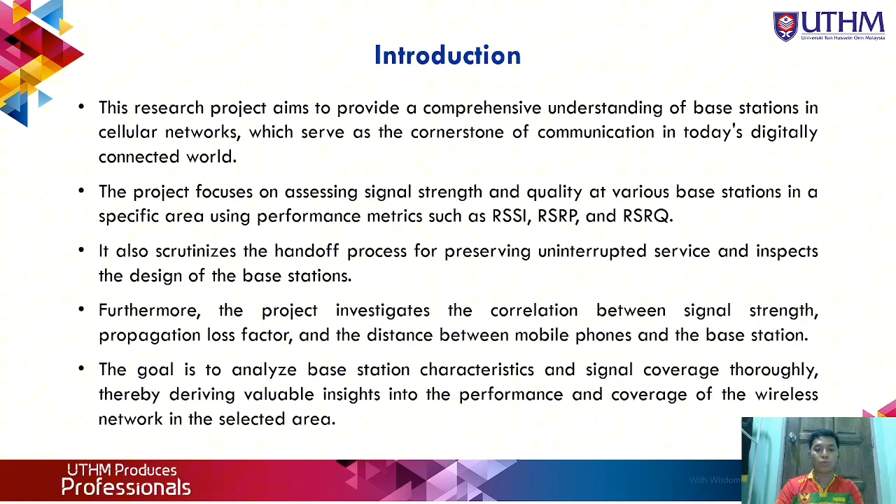And lastly, the goal is to analyze the base station characteristics and signal coverage, thereby deriving valuable insight into the performance and coverage of the wireless network in the selected area.

So moving on to the next part, which is methodology. The project was conducted in Parit Raja, Johor, and 3 mobile base stations were selected at 3 different locations. The first location is Kampung Parit Bengkok, then Jalan Parit Karjo, and lastly Kampung Teriman. The site location is an important factor in studying the handoff process of a mobile phone between two towers from point A to point B within a telecommunication network.

So this is base station 1, 2, and 3, and the measured locations to measure the power received from the mobile station and the distance between the mobile base station and the measured location. In this project, we are going to use CellMapper to measure the power received on the mobile application. CellMapper provides the power received and the GPS location, so we can get the precise location for our measured location.

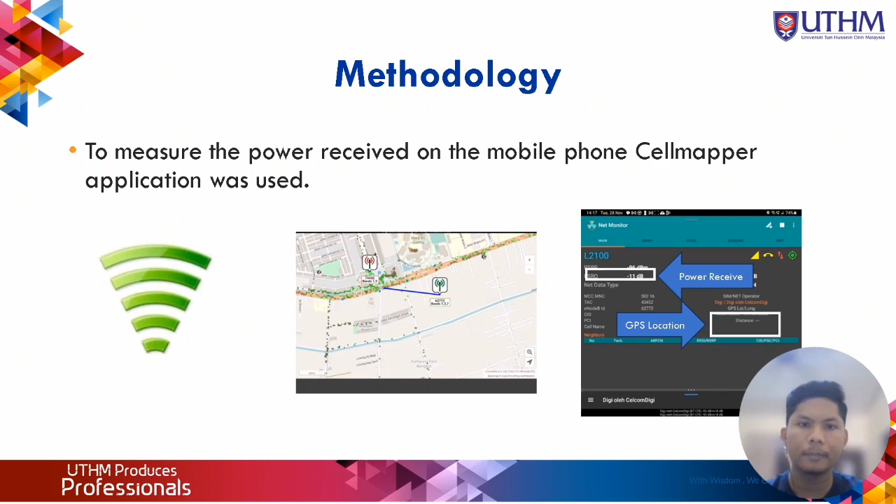The formulas that we use. The first formula is free space path loss, which is FSPL equal to 32.45 plus 20 log F plus 20 log d. The 32.45 is the constant. It is derived from the speed of light and the conversion between dB and natural units. The 20 log F term represents the frequency-dependent loss.

And the 20 log d term represents the distance-dependent loss. For the second formula, we use Okumura, which is L50 equal to FSPL plus Amu(f, d) minus G(hte) minus G area. The FSPL is the free space path loss from the first formula, Amu is the median attenuation relative to free space, G(hte) is the base station antenna height gain, and G area is the gain due to the type of environment.

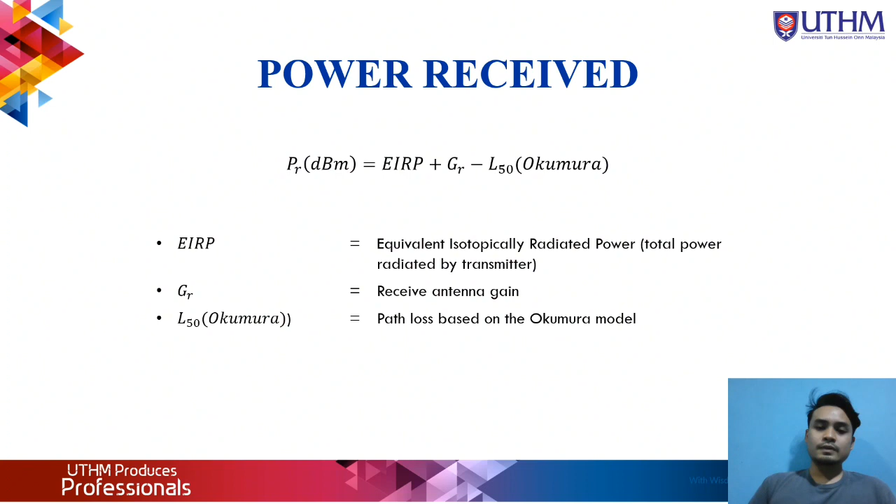For the analysis, data, and discussion, there are 3 base station areas that contain the chosen locations. Altogether, the data will be used to determine the level of the power received and the potential contribution to propagation loss. We will use the 3 formulas that I have mentioned earlier.

By using the following approximation, the plot points of Amu and G area are used for a number of frequencies in the Okumura model. For our base station, the frequency is 2162, and the area of our location is suburban, so the G area is 12. For the other base station, the frequency is 1870, so the G area for that frequency is 11.

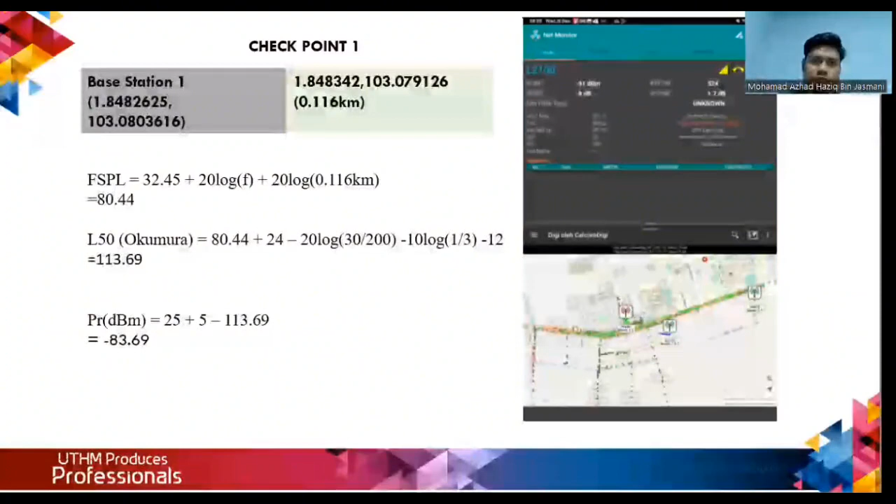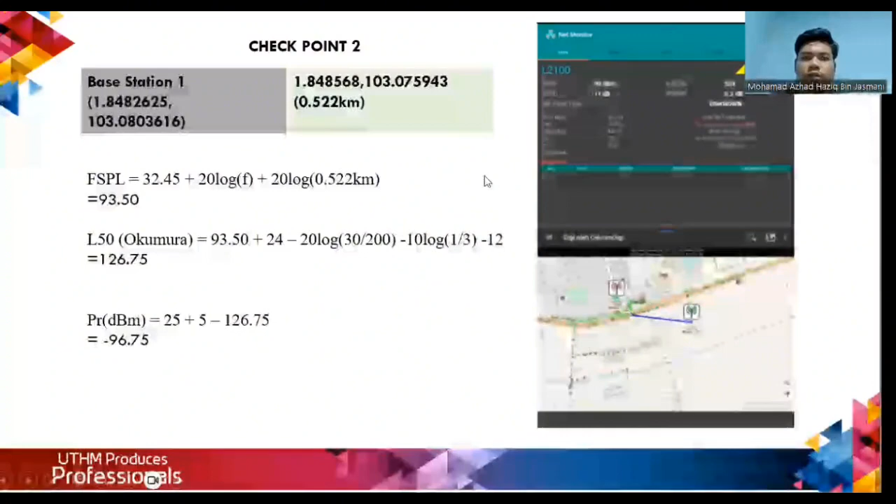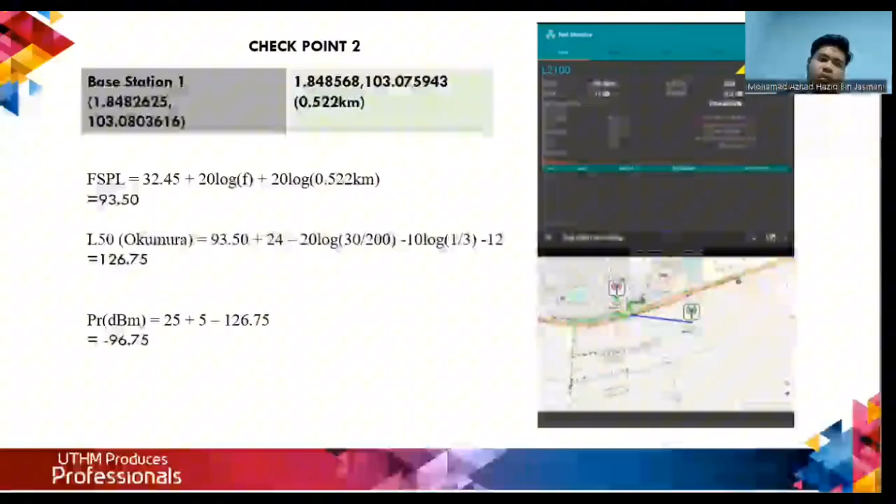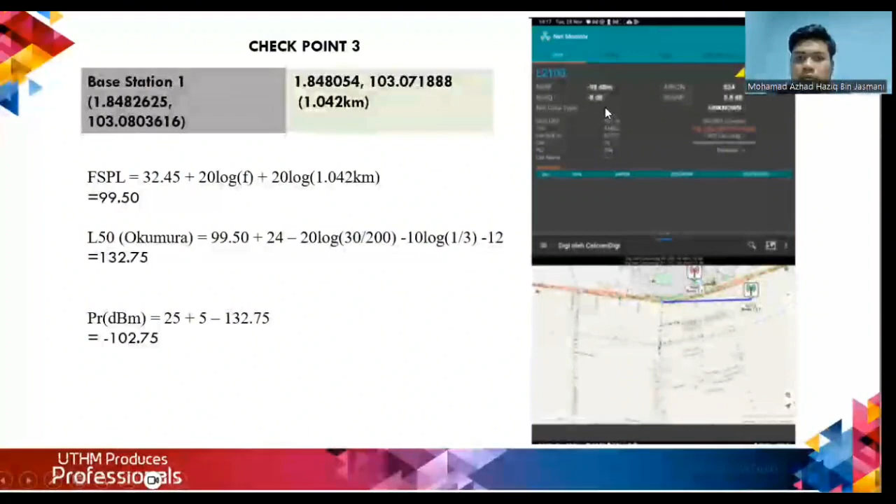Okay, for checkpoint 2, base station 1, the distance between base station 1 and the mobile station is 0.522 km, and we get the power received of negative 96.75, and for the RSRP we get the same, 96 dBm. Okay, for the third checkpoint, you can see we get negative 102.75, and for the RSRP at the cell mapper we get negative 98 dBm.

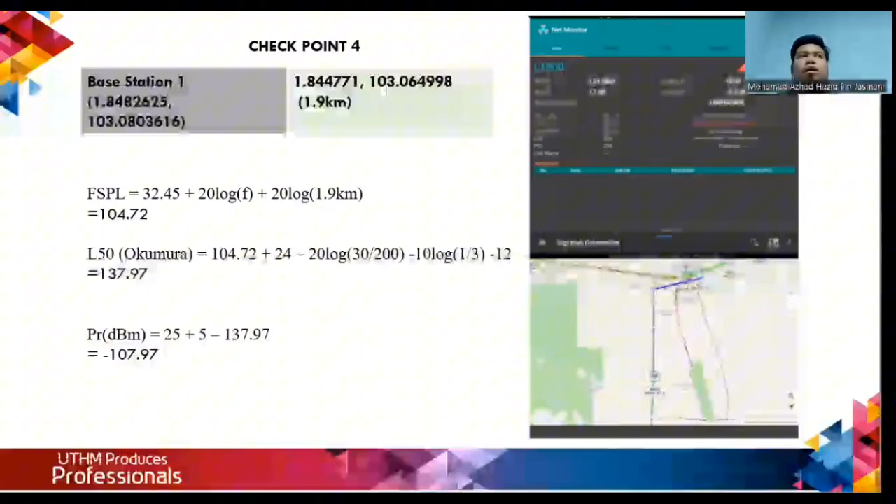That's checkpoint 4. We get the power received of negative 107.97, and the RSRP at the cell mapper we get negative 124 dBm. Okay, as you can see, at different locations the dBm changes. So the farther from the base station, the higher the negative dBm we get.

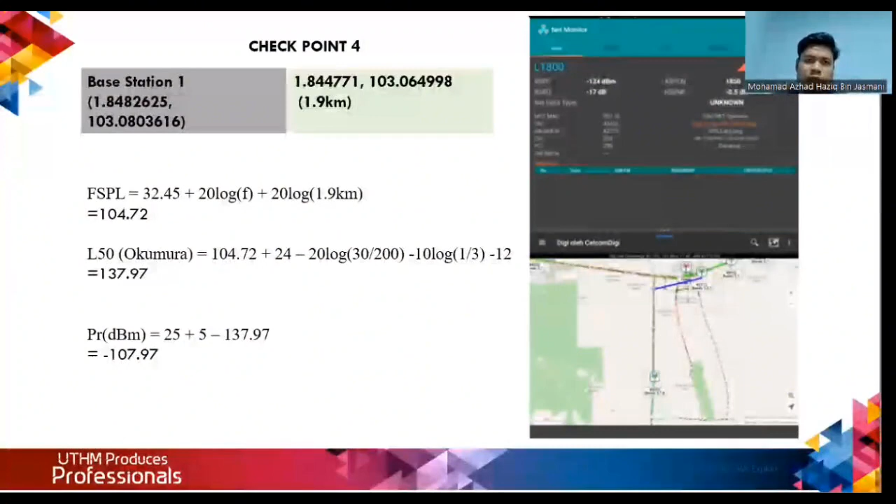Okay, for base station 2, for checkpoint 1, as you can see, the handoff is at checkpoint 4 and checkpoint 1. For checkpoint 1 for base station 2, the distance between the mobile station and base station 2 is 3.89 km, and the power received is negative 116.94. At the cell mapper we get negative 114 dBm.

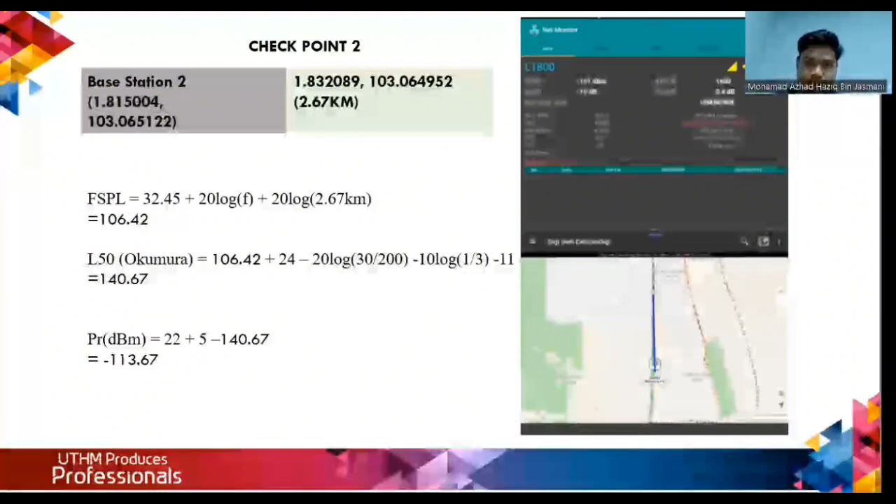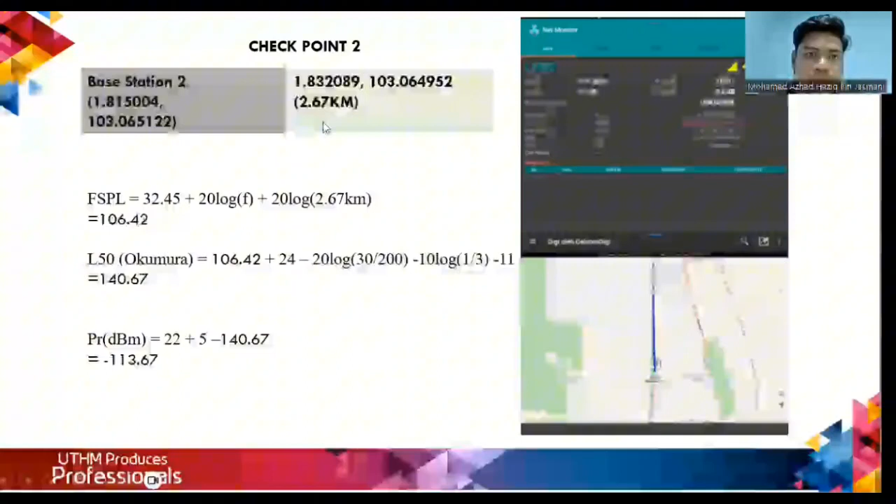Next is checkpoint 2. The power received is negative 113.67, and the RSRP at the cell mapper is negative 101 dBm. The distance between the mobile station and the base station is 2.67 km.

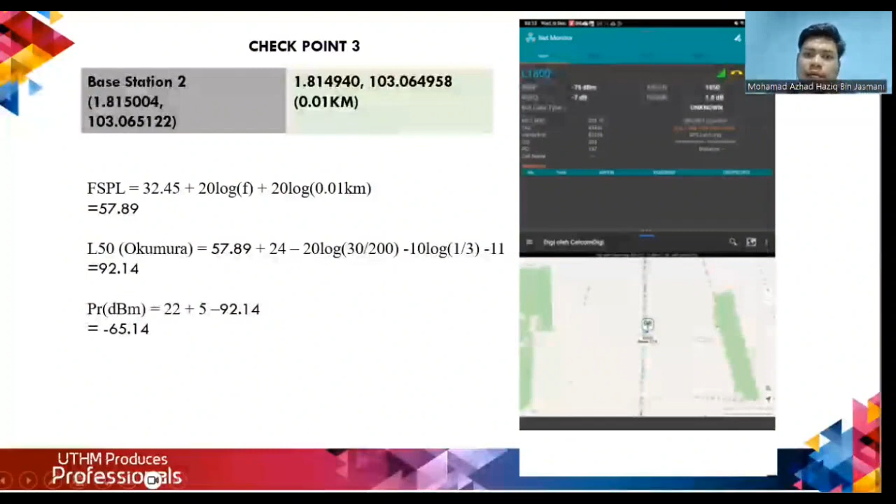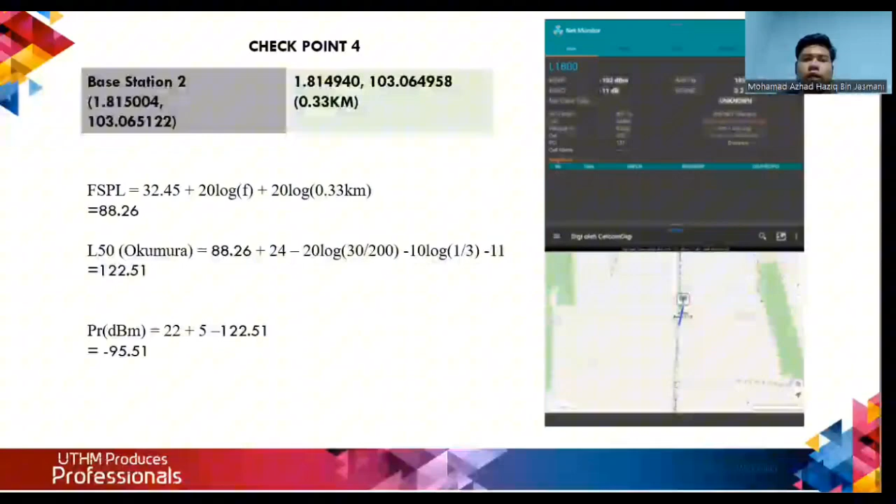Okay, for checkpoint 3 for this base station, as you can see, the distance is 0.01 km. The mobile station is behind the base station, and we get negative 65.14 power received, and the RSRP is negative 75 dBm. And lastly, for checkpoint 4, we get the PR of negative 95.5, and the RSRP is negative 102 dBm.

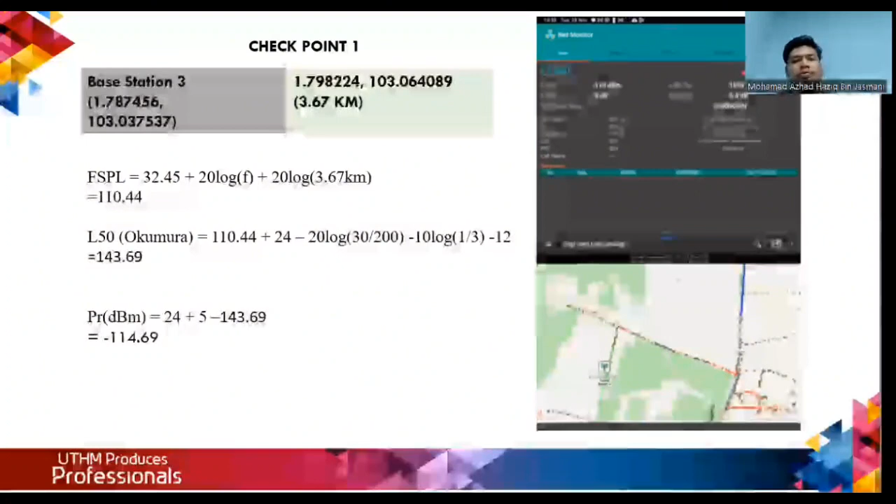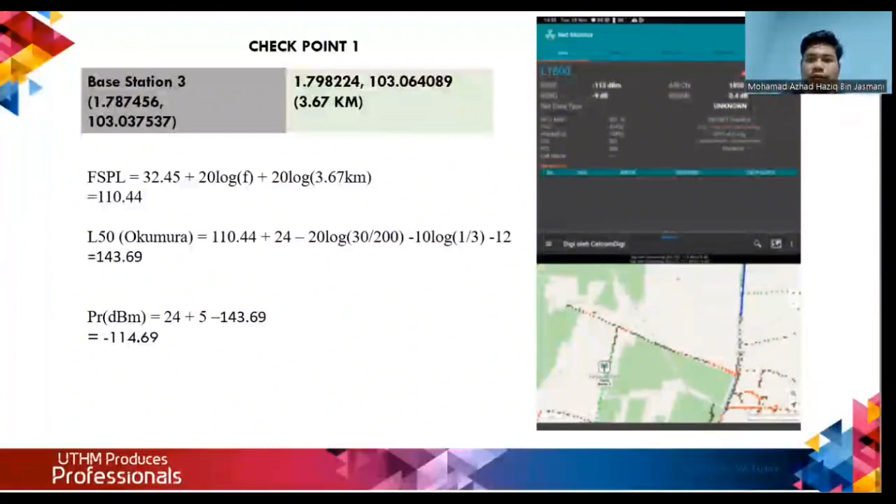Okay, for base station 3, for checkpoint 1, the distance between base station 3 and the mobile station is 3.67 km, and the power received we get is negative 114.69. The RSRP at the cell mapper we get is negative 113 dBm.

Okay, for checkpoint 2, you can see the handoff for checkpoint 4 and checkpoint 1, for stations 1 and 2. Checkpoint 2, the distance between the mobile station and the base station is 2.89 km, and the power received we get is negative 112.61. The RSRP we get is negative 114 dBm.

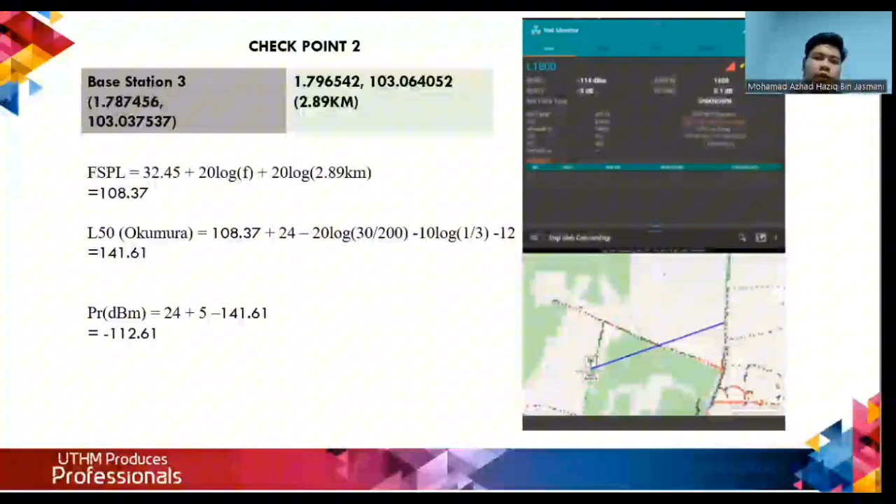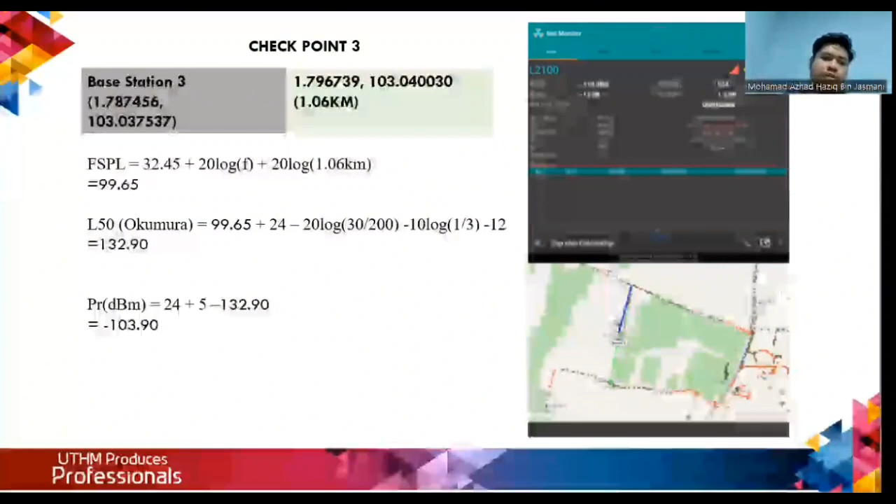Okay, for checkpoint 3, the distance is 1.06 km, and the power received we get is negative 103.90. The RSRP is negative 110 dBm. Okay, for the last checkpoint for base station 3, the distance is 0.04 km, and the power received we get is negative 75.44, and the RSRP at the cell mapper we get is negative 84 dBm.

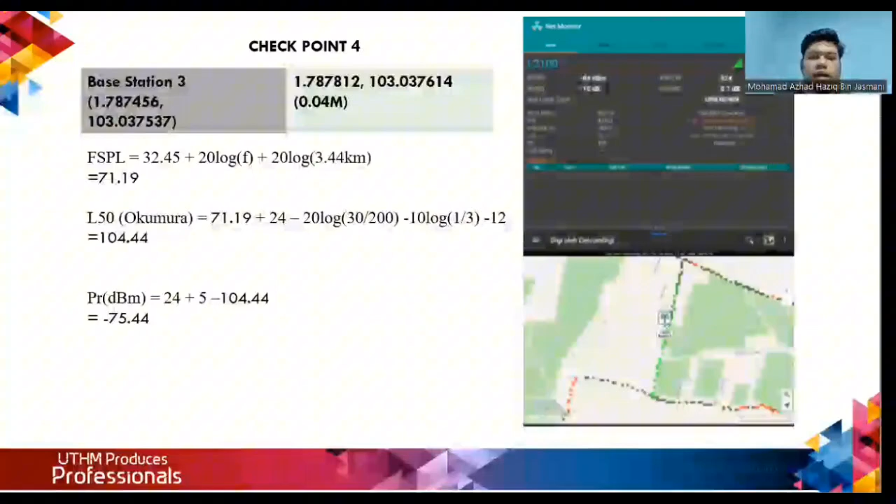As you can see, the simple conclusion: when we are close to the base station, the RSRP or dBm will be increased.

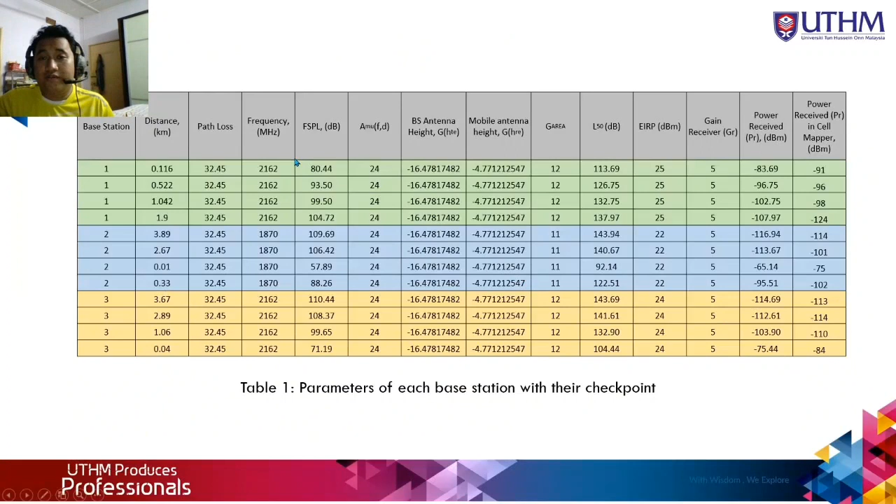I'm from Group 4. Today I will present to you in this slide the parameters of each base station with their checkpoints. Each base station has 4 checkpoints. For example, base station 1 has 4 checkpoints, base station 2 has 4 checkpoints, and base station 3 has 4 checkpoints. Each checkpoint has a different distance. The distance from checkpoint 1 to base station 1 is 0.116 km, checkpoint 2 is 0.522 km, checkpoint 3 is 1.042 km, and checkpoint 4 is 1.9 km.

So for checkpoint 1, the free space path loss is 80.44, and for the G area we use a 12, and we get the Okumura is 113.69. After we calculate all, we get the power received. For the one we calculate, we get negative 83.69, and compared to the power received in CellMapper, we get negative 91.

In checkpoint 2, the free space path loss we get is 93.50, and the Okumura we get 126.75, and after we calculate all, the power received PR we calculate is negative 96.75. Compared to the power received in CellMapper, we get 96.

Before that, I forgot to tell you the EIRP we set for base station 1 is 25, for base station 2 is 22, and for base station 3 is 24. We tune base station 1 to 25, base station 2 to 22, and base station 3 to 24.

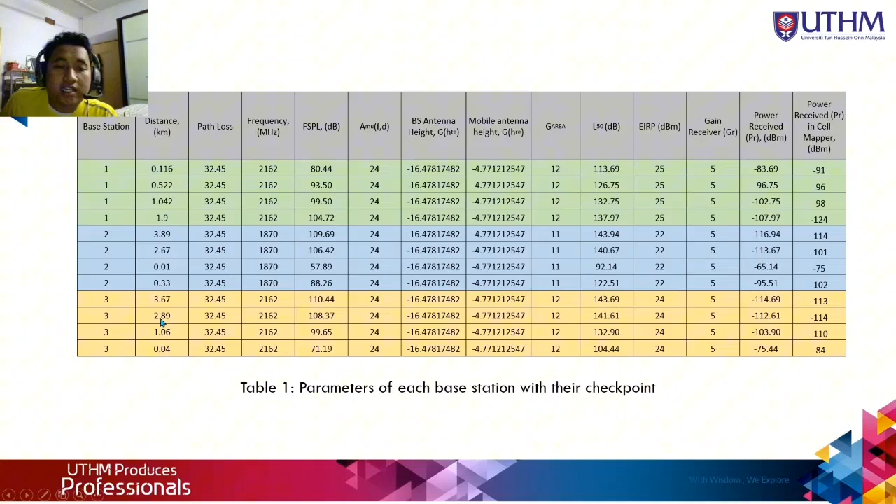So continuing to base station 3. Base station 3 has 4 checkpoints. The distance from the first checkpoint to base station 3 is 3.67 km, from checkpoint 2 to base station 3 is 2.89 km, from checkpoint 3 to base station 3 is 1.06, and from checkpoint 4 to base station 3 is 0.04 km.

In the first checkpoint, the FSPL is 110.44, and the Okumura we get 143.69. To get the power received PR, we tune the EIRP for base station 3 to 24, and the calculated power received we get is negative 114.69. So compared to the power received in CellMapper, it is negative 113.

For checkpoint 2, the FSPL is 108.37, and the Okumura we get 141.61, and the power received we calculate is negative 112.61, compared to the power received in CellMapper, which is negative 114.

For checkpoint 3, the FSPL we get 99.65, and the Okumura for checkpoint 3 is 132.90, and the power received we calculate is 103.90, compared to the power received in CellMapper, which is negative 110.

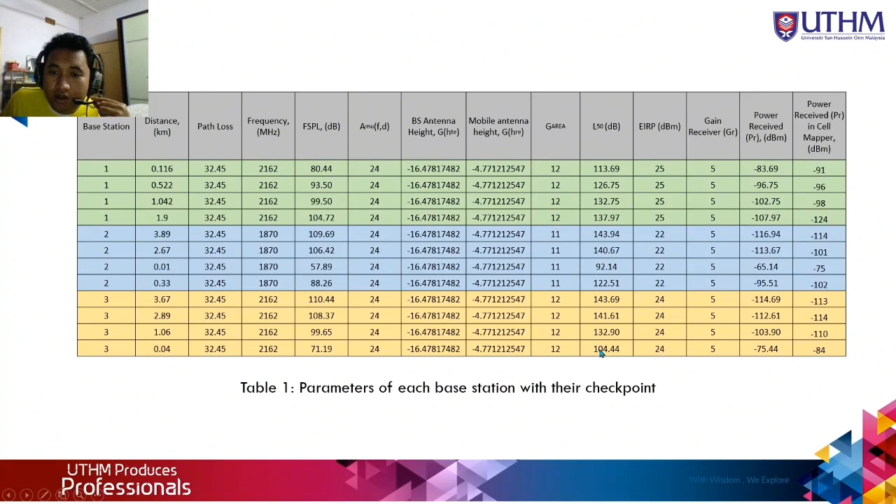For the last checkpoint for base station 3, we get the FSPL 71.19, and the Okumura we get 104.44, and the power received we get negative 75.44, compared to the power received in Cell Mapper, which is negative 84.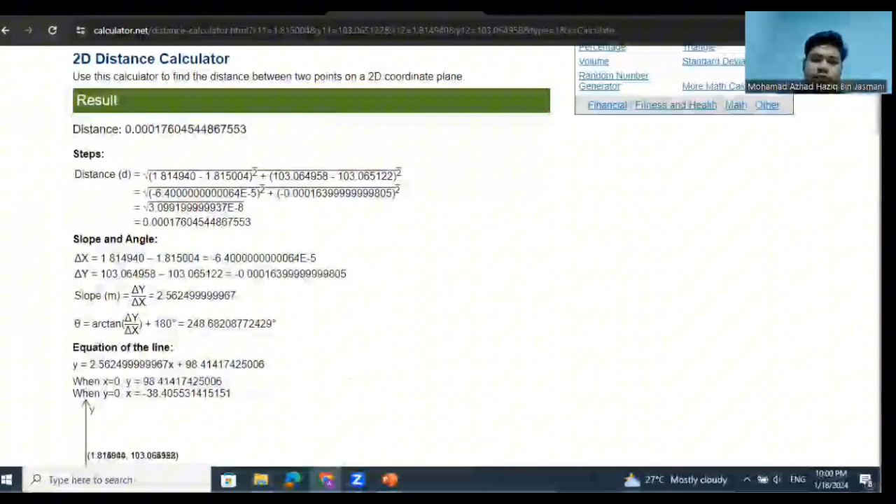So I'll choose question 3. What is the estimated cell radius of the chosen site? So the answer: the radius of a cell in a cellular network is usually determined by the maximum distance at which a mobile device can still maintain a good quality connection to the base station. This can also be linked to handoff. Handoff is the process of a mobile device switching from one base station to another while a call is in progress. This usually happens when the device moves out of the coverage of one base station and into the coverage area of another.

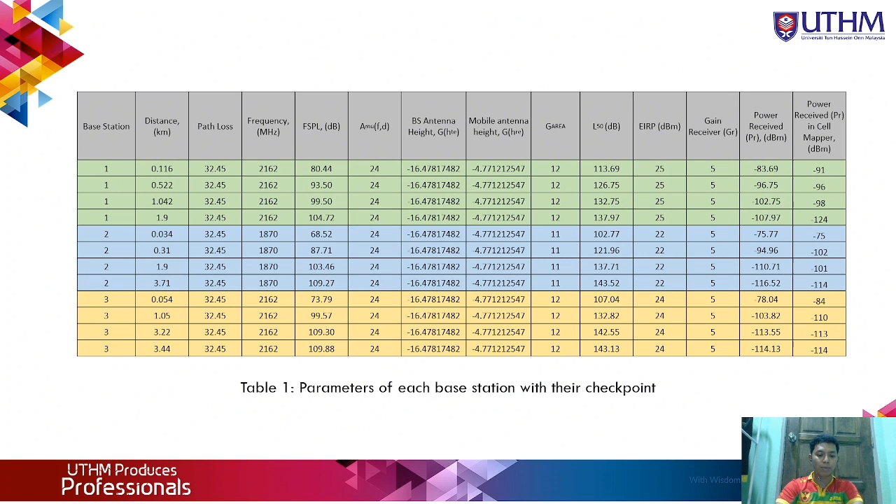So to estimate the cell radius is to determine the threshold for the minimum power level received. For example, if we consider 100 dBm as a threshold, then for base station 1, the radius of the cell is about 1.042 kilometer, because this is the maximum distance where the received power exceeds 100 dBm. So that's all from me for this question.

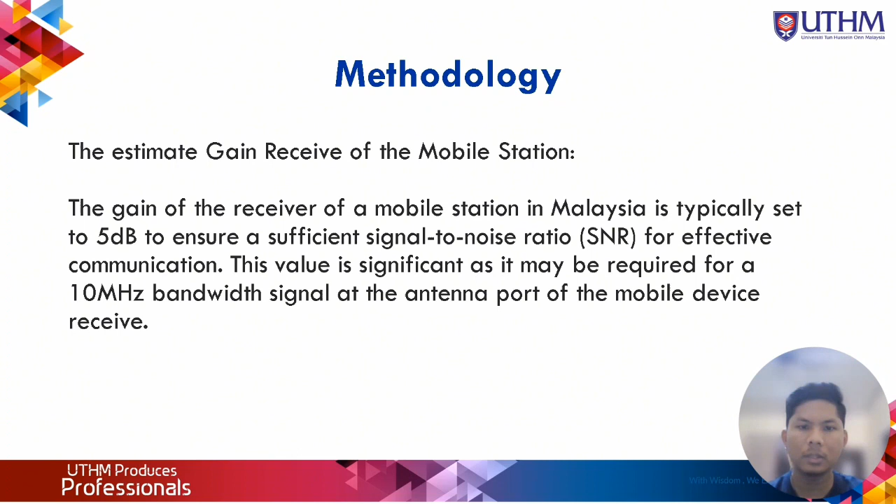So the estimated gain of the receiver of the mobile station. The gain of the receiver of a mobile station in Malaysia is typically set to 5 dB to ensure sufficient signal to noise ratio (SNR) for effective communication. This value is significant as it may be required for a 10 MHz bandwidth signal received at the antenna port of the mobile device.